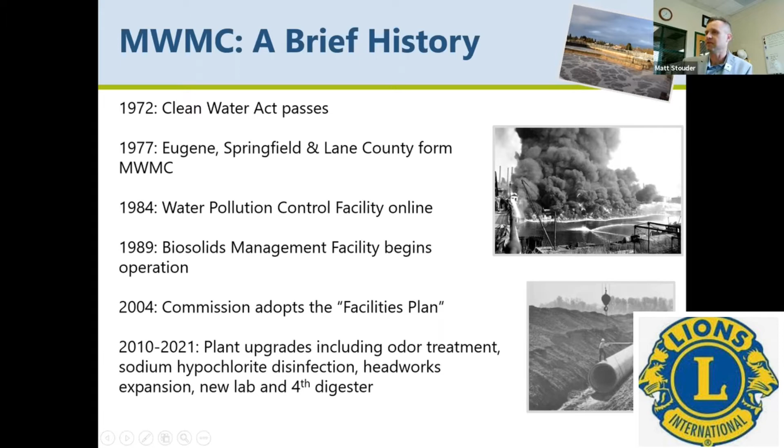So as I mentioned, the MWMC is built on partnerships. And I should ask, if anybody has questions during these slides, feel free to interrupt us with a question, or you can hold it to the end, whatever works.

Springfield is responsible for the administration of MWMC. So we work with the commission, we deal with permit issues, and work with our budget and our capital construction program and project delivery. And then Eugene is responsible for the operations and maintenance of our assets.

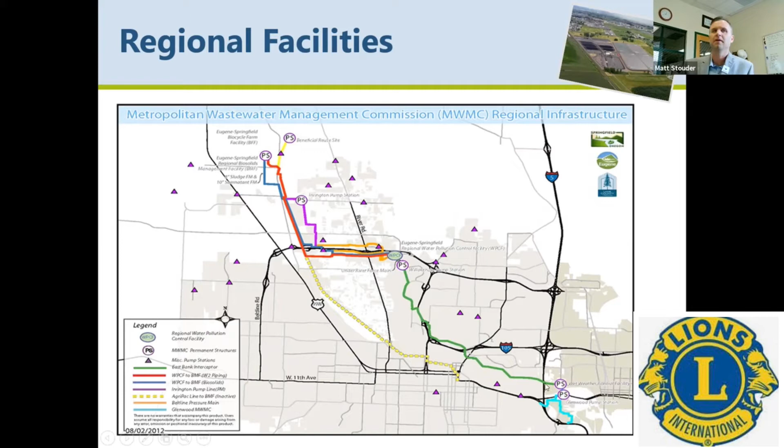So we get about 30 million gallons on average every day, with some high flows in the winter because it rains a lot, the groundwater table rises, and throughout Eugene and Springfield there's joints and cracks in the sewer pipe where groundwater can infiltrate and get in. We're constantly working on that to try to get that plugged up, but that's the reason for some higher flows in the wintertime.

We're regulated by Oregon DEQ under what we call a discharge permit that stipulates all the treatment requirements, how clean the water must be before it can be discharged to the river. DEQ is delegated by EPA to run that program, as most states do. We also have a laboratory on site to do all of our lab work, and we also provide some support to the local stormwater programs with lab analysis. It takes about 78 full-time people at the plant to run this 24/7.

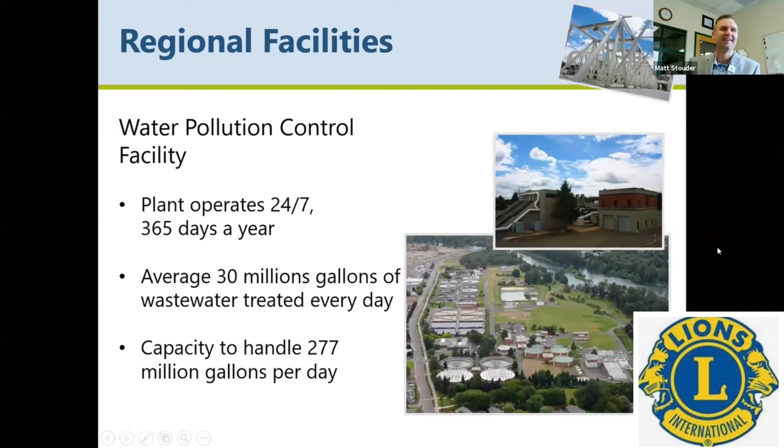Okay, thank you. If it's okay with you guys, what we'll do now is show a 4-minute video on the overview of the wastewater process. This has worked fairly well in the past. Hopefully it will work here, depending on your internet connection. But if this doesn't work very well, just let me know and we can talk through the process. Let me know if you can hear this as well.

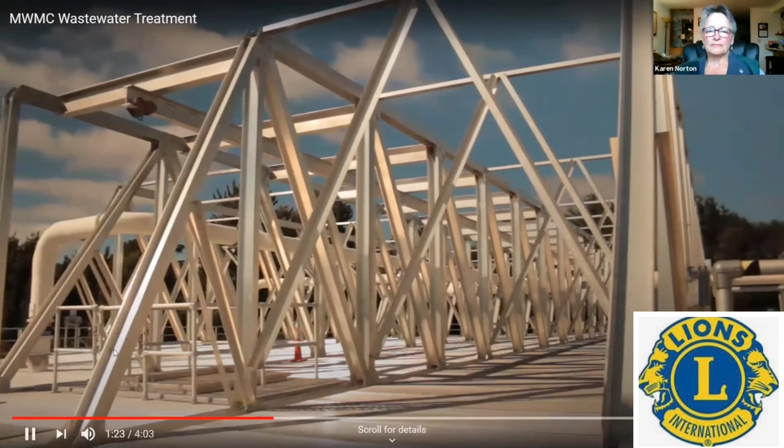No sound. So for some reason, we're not getting any sound, Matt. You guys aren't hearing it? No. Okay, bummer. I can send this out afterwards. I think that might be easiest and you guys can watch it at your leisure.

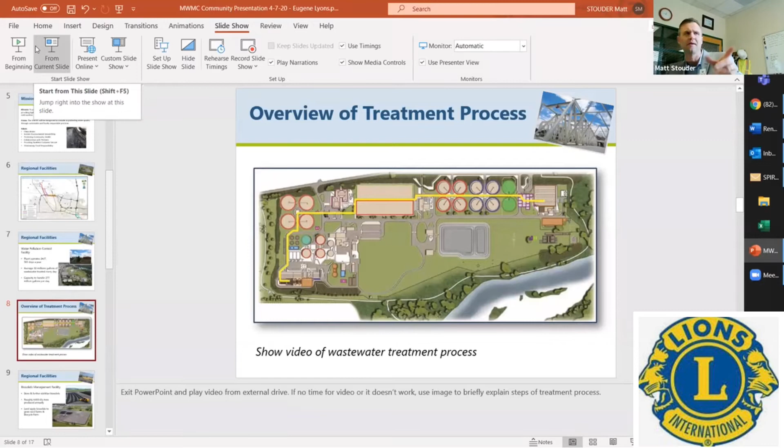Let's see here. So with that, I'll go back to here and start. Maybe Dave, you can start walking through primary, secondary, and then. Yeah, I'll try to describe this process for you. The flow comes into the treatment plant at the lower left of the screen into our pre-treatment facility. There we remove large debris, rocks, rags, and sticks in the wastewater. All of that gets ground up, dewatered and transported to the landfill. Then if you follow the yellow line to the top left, where we have 4 circles, those are our 4 big primary clarifiers, and they just act as settling tanks.

These are our most economical treatment process. Primary treatment removes at least half of the solids in the water and also the oxygen depletion capacity as the wastewater degrades in water. So that is the physical treatment. Then what's left over still has fine particulate solids in it, and it flows to the middle upper rectangular area where we have large aeration basins. This is the start of the biological treatment process, which converts dissolved organic matter and fine particulates that won't settle into a settleable floc. And we take advantage of naturally occurring microorganisms that reside in water around our environment.

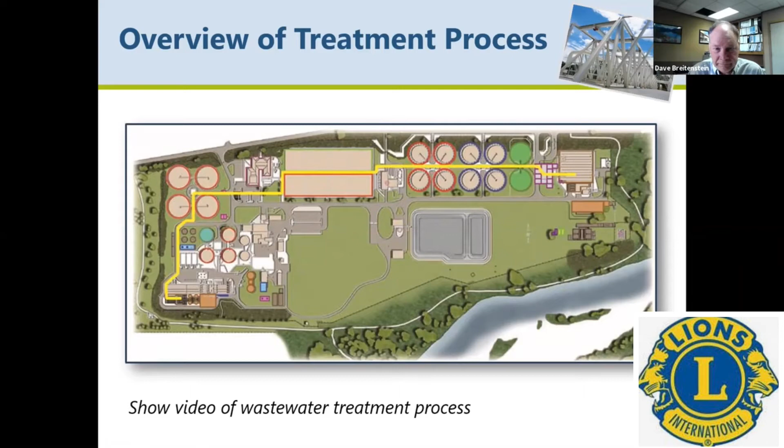Okay, and then another offsite facility. Back when the regional facilities were constructed, the commission made a decision to locate the solids processing after anaerobic digestion out of town for a few reasons. It takes a lot of land, and it's also one where there tends to be more odors generated.

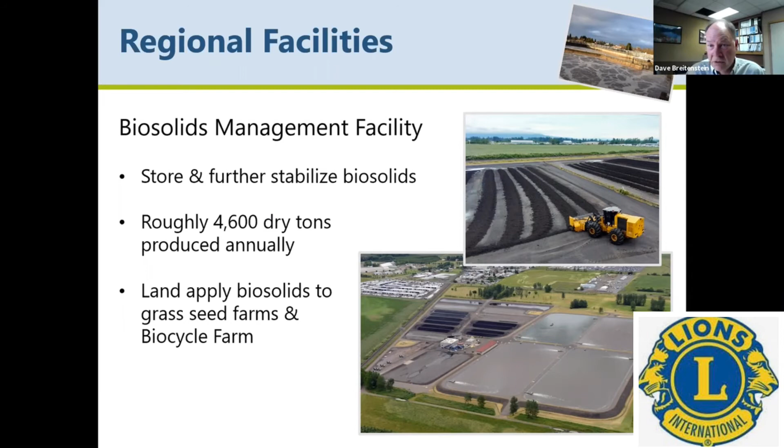Okay, I mentioned the BioCycle farm. 20 some years ago, the commission decided, well, we probably shouldn't only rely on private lands and agreements with local area farmers. What if someday they were no longer interested in participating in our program? What would we do with the biosolids? So they got a community advisory committee together to help them analyze the situation. And anyway, it ended up with a recommendation to buy some adjacent property next to the facility. And they bought 600 acres and decided to start growing poplar trees.

So this was all set up for a poplar plantation, and poplars were selected because they can actually take more water and nitrogen than most any other crops, more than grass seed crops. The rate of biosolids that are applied to the grass seed and to the poplars are limited on what the crop uptake of the ammonia nitrogen is as the available nutrient. And that's how we measure and know how much to put on, because just like at home, if we over fertilize our grass, it's too much for the grass, it'll kill it. But not only that, the chemical is absorbed down into the soil, it keeps going down and ends up in the groundwater and contaminates the groundwater.

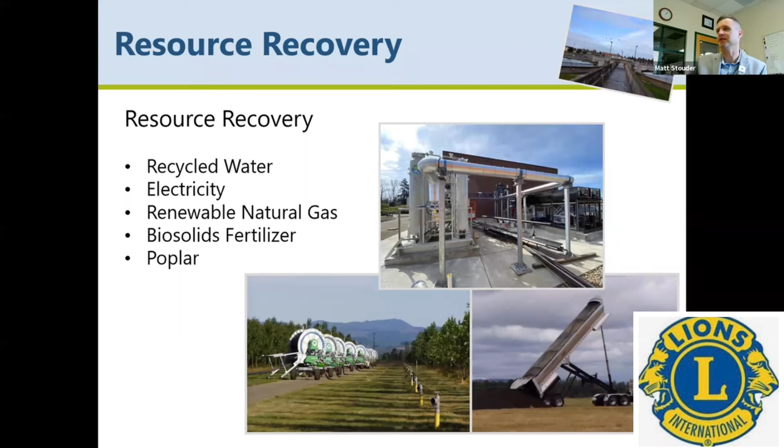So I think we'll do a quick time check. I have about 5 minutes left, but I can either stop or blast through it. I wanted to see where you guys want to go and leave time for questions. So we are at time for those people who need to depart, get back to work. We need to let them get back to work. If you want to go ahead and continue on, this is quite interesting. And I know that we got started maybe a little bit later than normal. So go ahead and proceed if everybody's okay with that. Yeah, if people need to drop off, it's not going to hurt our feelings. So we'll blast through this real quick and then see if there's any questions.

For the remaining slides, we have a robust community outreach program. When times are normal, pre-COVID, we did a handful of tours throughout the year with local groups, community groups, schools. We have a program affectionately dubbed Clean Water University, where we get 5th grade students from across Eugene and Springfield out to the wastewater plant, 700 plus students in the fall that go through 10 different activity booths in partnership with our drinking water utilities, EWEB and SUB.

And then they learn about wastewater, stormwater, and the water cycle, and then they get to take a modified tour of the plant. That's been really popular, and we're doing that program virtually this year. And lastly, I'll mention that we have a number of community events that we sponsor or have booths at, like the Lane County Fair, EWEB's Run to Stay Warm. And then last year we partnered with Lane County on their summer movie drive-in series.

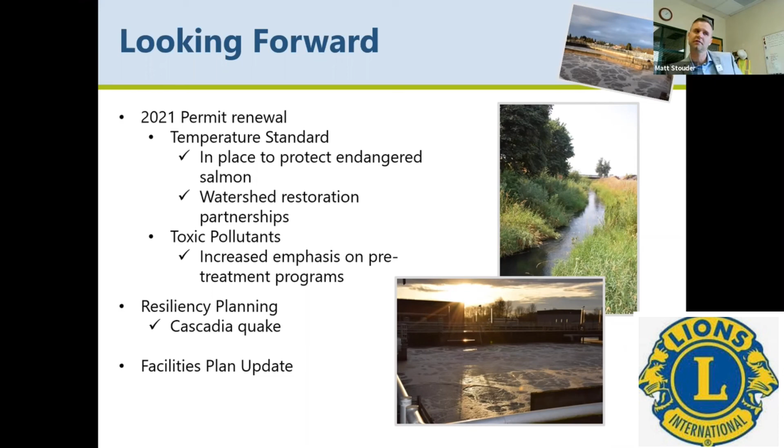So you can pour grease from cooking into a metal can, let it harden. You don't even have to freeze it. Actually, you can just let it harden in the can and then throw it in the trash. That keeps your pipes from clogging up, and it keeps our pipes from clogging up, and it makes the system operate in a happier manner. Also, we've seen a lot of disposable wipes that aren't disposable. So take wipes and other things that shouldn't be flushed, paper towels and kitty litter, and throw them in the garbage can.

And then if you have unwanted or expired prescription drugs, those can be dropped off at med return boxes at various spots in the community.